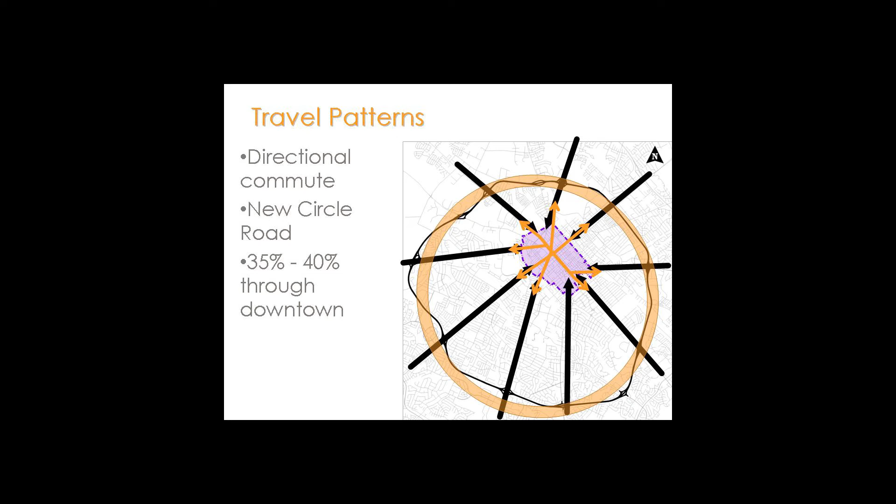But the other thing that we learned as we got into a lot of the data, and something unique about Lexington, is that of all the travel downtown, about 35 to 40% of that is passing through the downtown area. And we actually got this from cell phone data that was acquired for use in this study. So we've got a lot of layers of complexity here. There's been a lot of ideas about what this study was doing and what it wasn't doing. So I just wanted to clarify that as part of our meeting tonight.

What we did was we quantified the anticipated traffic impacts that would be associated with converting these different one-way pairs, identifying the issues associated with that conversion, identifying where we would anticipate the problem areas to be, and I'm going to talk about a couple of those in a minute, including ways to possibly mitigate those impacts. Providing information to the decision makers, and again, that public participation, getting your thoughts, getting your input.

What we did not do is provide recommendations on streets to convert. We also have not provided any design plans for doing so. This study has really primarily been focused on traffic. So we didn't deeply delve into other things like impact on property values, for example. We do touch some on pedestrian safety and walkability, but some of the softer stuff that's really hard to quantify, like the friendliness and sense of place, we recognize that it's there, we recognize the importance of it, but we just did not address that.

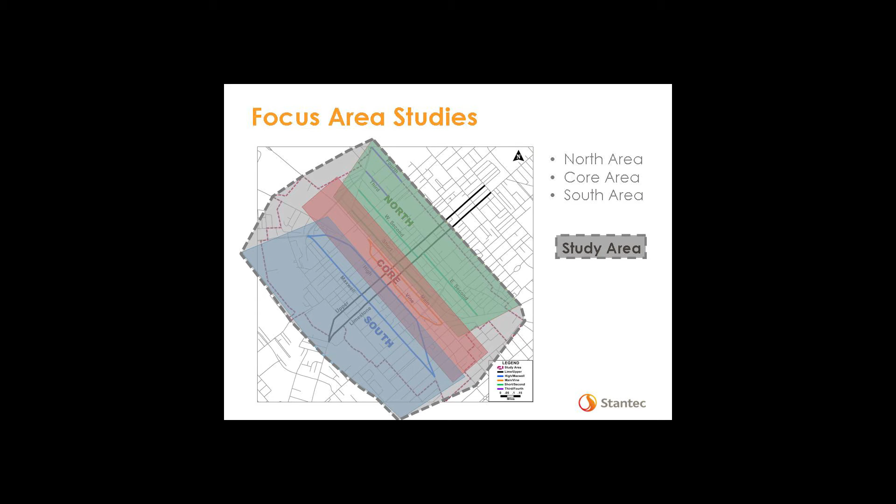So there are the study areas. I won't go over that. I do want to say that even though we looked at each of these individually, when we considered the impacts, we really considered that whole downtown area. So we kind of put a shape around all of it and considered the effect on the whole downtown area. In fact, that grayed out area was really our study area from, say, 4th Street down to Euclid Avenue to, say, Ashland Avenue on the east end and just past Newtown Pike Extension on the west end. That was really our downtown area that we studied.

Just briefly, to go over what we concluded from the North Area study, it was actually a couple of years ago that we had a public meeting on that. On our project website, which I'm going to put up again at the end of the meeting, there's actually the technical document that goes over all the details of that if you want to dig into it. We've done the same thing with the south and the core areas, and we kind of did those studies in parallel. Finished the technical parts of those late last year. On the website, there is a technical report giving all the results of those as well. And then the public meeting for the south and the core areas combined is what we're having here tonight.

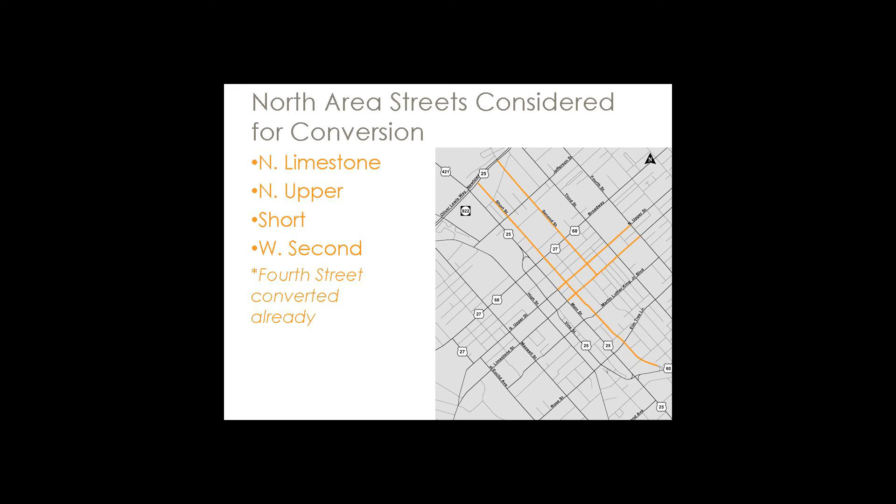So again, for the north area, we examined North Limestone, recognizing that North Limestone and North Upper were different in character and function than South Limestone and South Upper. So we looked at what happens if we converted North Limestone and North Upper beyond Main Street, along with Short and 2nd Street. As I mentioned before, 4th Street had been converted already.

We concluded that when you talk about traffic impacts, using our traffic tools to model this hypothetical scenario, that as two-way, North Limestone and North Upper, Short Street and West 2nd really didn't show a lot of tangible, significant differences compared to those streets being one-way. If they were two-way, we didn't see a lot of difference, just a slight change, but not a lot.

Big reason for that is the amount of traffic on the north side is considerably less than in the core area and on the south. So we can look at our network as having some available capacity that's not being used right now.

One thing that was not feasible was East 2nd Street. And if you think about it, East and West 2nd really are two separate streets. They don't line up. There's a jog in between, and you can't easily go from one to the other. For a couple of reasons, it would not be feasible to convert East 2nd to two-way, particularly on the very east end between Race Street and Midland Avenue.

It's quite narrow. The on-street parking that's there is used for residences, and for some of those places that's all they have. As a two-way street, that would have to be eliminated and would give those people no place to park. The block of what we call Constitution Street, that Sayre Avenue crosses, there's a lot of pedestrian activity, and there's a whole lot of concern by Sayre School about that being two-way. So for those reasons, it did not make sense really to consider East 2nd for conversion.

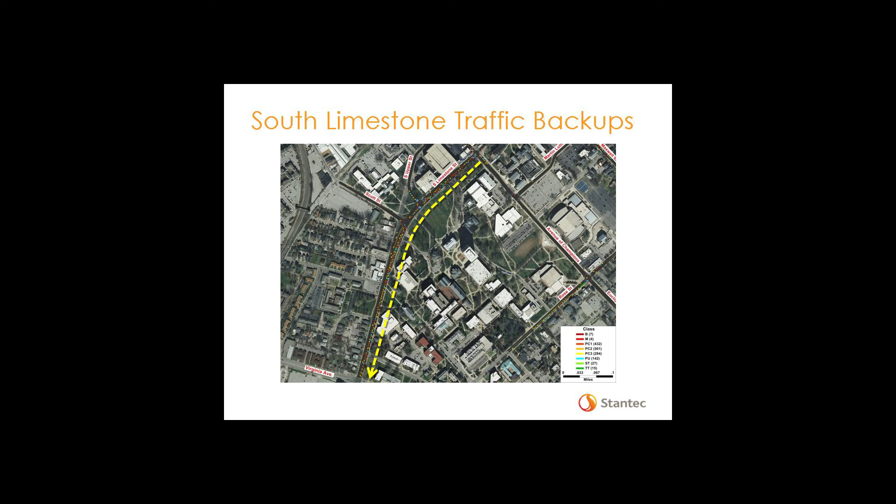In fact, possibly longer than that, but our tool stopped at that area, so we really don't know how much farther. But if the south area streets were converted to two-way, one of the things that we definitely would see would be more traffic backups on certain streets. And South Limestone, particularly in the morning, would be one of those.

Some of the other impacts: at intersections like Maxwell Street and Limestone, or Maxwell and Upper, for example, if two-way, there would need to be a little pocket in the center to make a left turn. So there would actually be 3 lanes, and to do that it would mean that in the vicinity of these intersections we would need to get rid of a little bit of the on-street parking, maybe 150 feet or so back on each leg, so that you could have the room for that vehicle turning left, because all it takes is one car turning left. If you don't have a separate lane, then it backs everybody up because you've got traffic coming in the other direction. So we noticed this effect, particularly in the south area, which means that on a limited basis, some of that on-street parking would be lost.

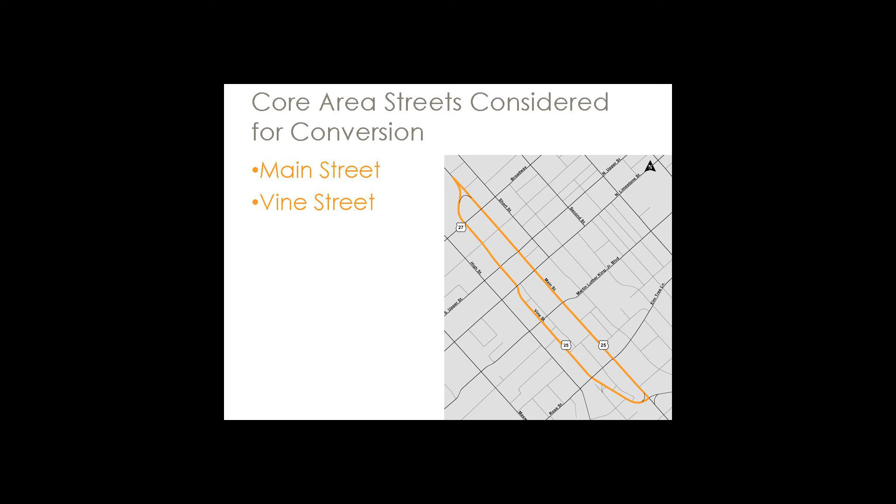The big thing that came out of this is that there was really just not a lot of interest in going any further with this idea for the south area, from UK, from the businesses in the Woodland Triangle. So that was really our finding: to support the conclusions from the analysis, there just wasn't a lot of interest in pursuing this further. And so then the last part is the core area. Again, this is Main and Vine Street.

We started with a number of options for how would you make Main and Vine two-way, and all of these, using these traffic tools, allowed us to do this in kind of a virtual laboratory where we can model this and simulate the impacts without actually having to do it to see what happened. So we identified a number of alternatives. There were a couple that kind of made the cut and went further into really detailed evaluation,

But the whole fundamental assumption was we maintain whatever curb-to-curb width is there now. And in fact, I believe that the council established a 44-foot curb-to-curb limit as part of the streetscape master plan back a few years ago. And so we've tried to stay true to that in identifying these alternatives. So that was one option.

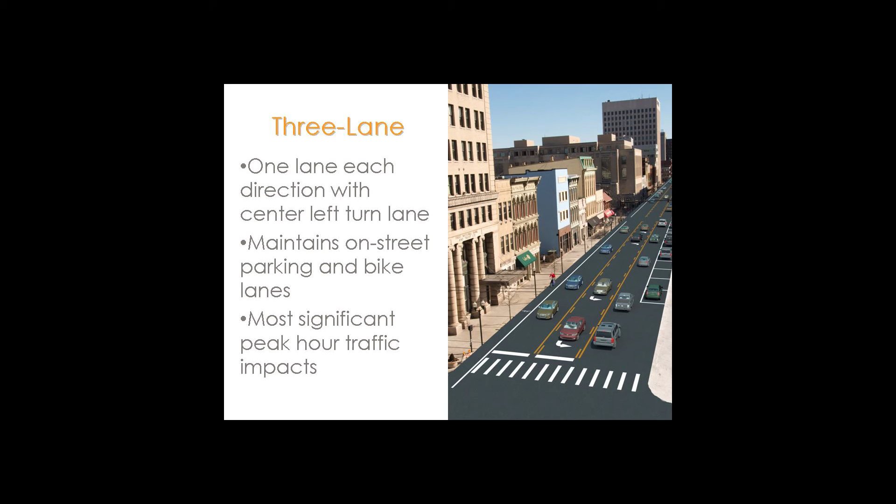Of course, because we are really reducing the number of through traffic lanes in either direction, we would expect, in terms of those metrics that we can use to describe traffic conditions, we would expect the biggest difference between that alternative and the way things are today.

There was another alternative which we called the 4-lane, and it was essentially 2 lanes in each direction instead of 1. And now my thing doesn't want to work at all. So again, what this does is it gives us 2 lanes in each direction. At a number of intersections during rush hour, we would not have a center left turn lane. In fact, because of the heavier traffic volumes, left turns would be prohibited at a lot of what we might consider the minor intersections.

And at some of the most important ones, we have to really get into a final design to tell you exactly how many, somewhere between 5 and 7 intersections, it would be necessary to actually widen the pavement, to go beyond the 44 feet that's there, because we would need 2 lanes in each direction, plus a left turn lane. We still have a pretty heavy demand to make left turns in some parts of downtown.

One of those, today, if you're going westbound on Main Street and you turn left onto Upper to go toward UK, that's a very heavy movement. You have to accommodate it somewhere. So that was kind of a fundamental assumption in this alternative, how would we accommodate that. It also means that, particularly on Main Street, because that width that's there now would be taken up in traffic lanes, that on-street parking would be lost.

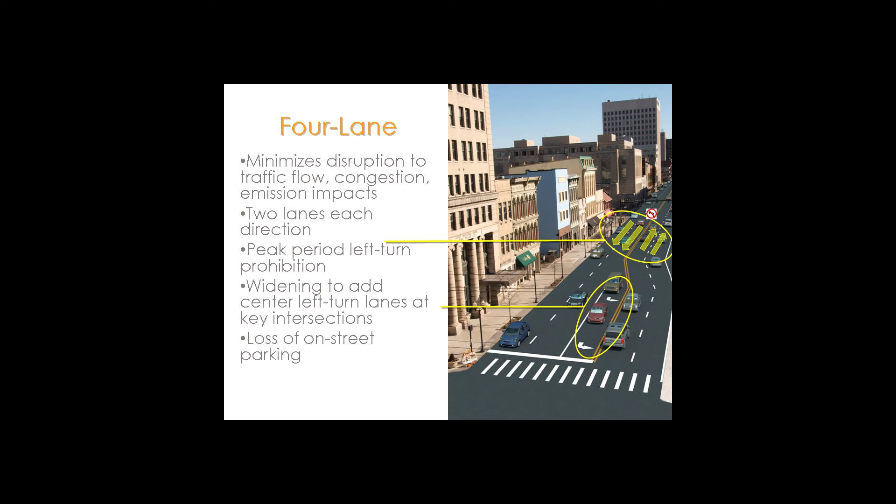Currently, between Rose and Broadway, I think we've got somewhere in the order of 90 plus spaces, and it would mean losing probably about half of those, or up to 50, somewhere in that stretch. All right. And same thing with the bike lane. So that's part of the trade-offs that Dow talked about before. When we consider these alternatives, we also got to consider trade-offs.

So in a similar fashion that we did for the south area, what does this do on this driving around the block effect? And we have both the 4-lane and the 3-lane alternatives. Compared to the way we have things today, they both reduce that circuitous travel, and by how much depends on the time of day. And the main thing to point out is that 3-lane alternative reduces that more than the 4-lane alternative. We're not prohibiting left turns anywhere. You can make the left turns everywhere. So if you look at just from point A to point B, how long it would take to drive that distance, that circuitous travel is reduced more under that 3-lane alternative.

I have to ask a question on that. If you can't find parking? Yeah, it would, and that is the assumption that the parking is there. Okay, so we really didn't get into that. That would be under the assumption that the parking is where you need to find it, but that's a good point. Okay.

When we talk about that travel time, again, within that downtown area, it would be longer for a typical trip, and the 3-lane alternative would increase that overall more so than the 4-lane.

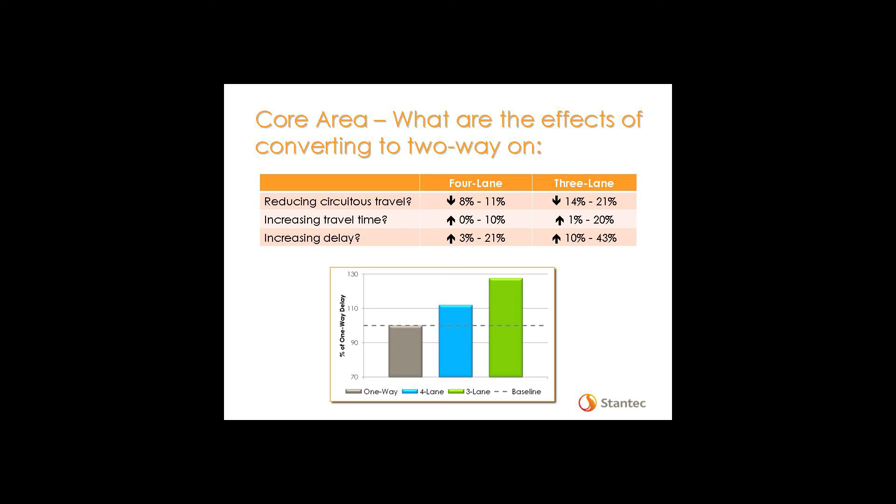Same thing with that extra time, that delay associated with more traffic congestion and slower speeds, all right? And we see the pattern here in terms of the impacts is that those metrics that we use that came from our tools to compare with the way things are today, there's a bigger difference between our current one-way system and the 3-lane as there was between the one-way system and that 4-lane alternative.

As I talked about before, this is just kind of a summary slide that particularly the left turns with the 3-lane alternative, we have that in the center left turn lane. It goes down Main and Vine entirely, so at every intersection we can accommodate those. Under the 4-lane, if it's off-peak, you don't prohibit it anywhere, but there's not a separate lane to turn from. During the peak hour, in some places you don't allow that at all, which means that you have to go downstream to the next intersection where there's a turn lane.

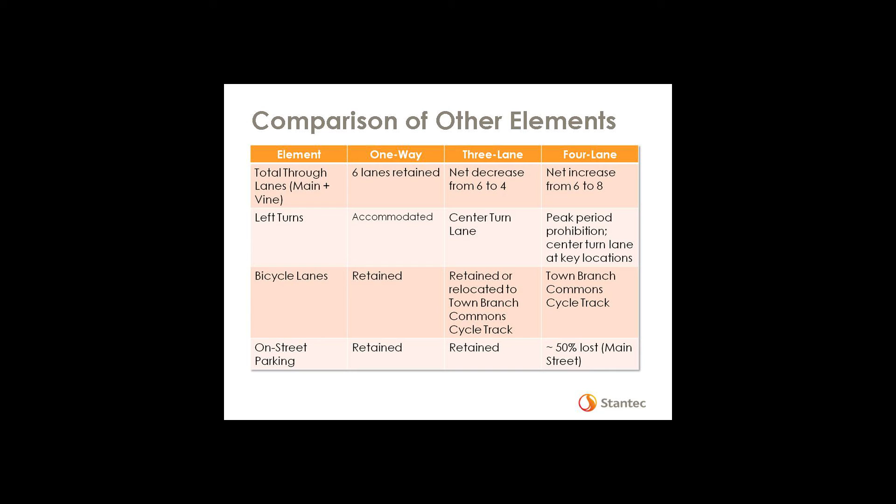The bike lanes, I did talk about those, particularly under the 4-lane alternative being lost. I do want to point out that the Town Branch Commons has the bike facility that's part of that called a cycle track. So if you want to consider that as not so much being lost as relocated, it's just something to point out that if one alternative were to take it away, it's not like it would be totally eliminated. It'd just be in a different place. And again, under the 3-lane alternative, the on-street parking is retained if it's there today. On Main Street in particular, under that 4-lane alternative, we think at least probably half of that would be eliminated.

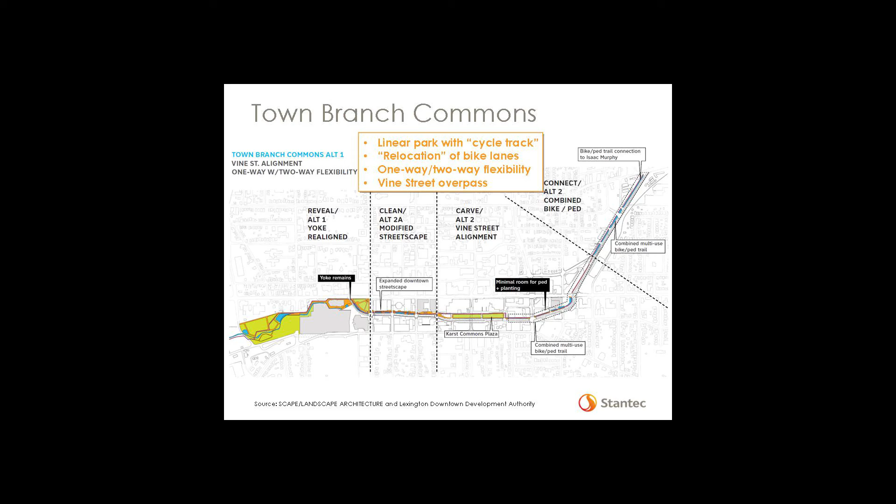Again, I talked about the Town Branch Commons, the cycle track, relocating the bike lanes. The plan for Town Branch Commons is whatever decision is made for one-way or two-way with regard to Vine Street, that it's flexible enough to accommodate that either way. Also, in some of the information I've seen, it does discuss an overpass of Vine Street. We're going to talk about being able to get across Vine Street and the importance of that issue in just a moment. But there's at least acknowledgement of that issue in the Town Branch Commons plan as well.

So just the conclusions from the core area analysis, the 3-lane alternative, when we think about the other modes of transportation, bicycle, pedestrian, even transit, it certainly fits that better, where the 4-lane was really more auto-oriented. Those are kind of like the extremes of how you may convert Main and Vine to two-way. Both of those, when compared to one-way, would produce longer travel times, slower speeds also, the trips would take longer, and the delays associated with that would be higher.

When we talk about the effects of congestion and changing that, we saw more of an impact with the 3-lane, as you would expect, particularly with the impacts I talked about in the south area and the backups on South Limestone. We saw similar effects, particularly associated with the 3-lane, especially coming in on East Main Street in the morning, traffic backing up, say, beyond Ashland Avenue, on Midland Avenue coming into downtown and backing up to 3rd Street or where it becomes Winchester Road or beyond. So we're seeing that in some areas as well.

Also, a likely effect of this would be that our rush hour may become a rush hour and 15 or 20 minutes or whatever. People may wait longer to leave or may come in earlier, so that peak period would just be extended. We certainly have seen that in the growth of urban areas over the years. And while we still pretty much have a rush hour within Lexington, it's possible that could happen as well as a response to that.

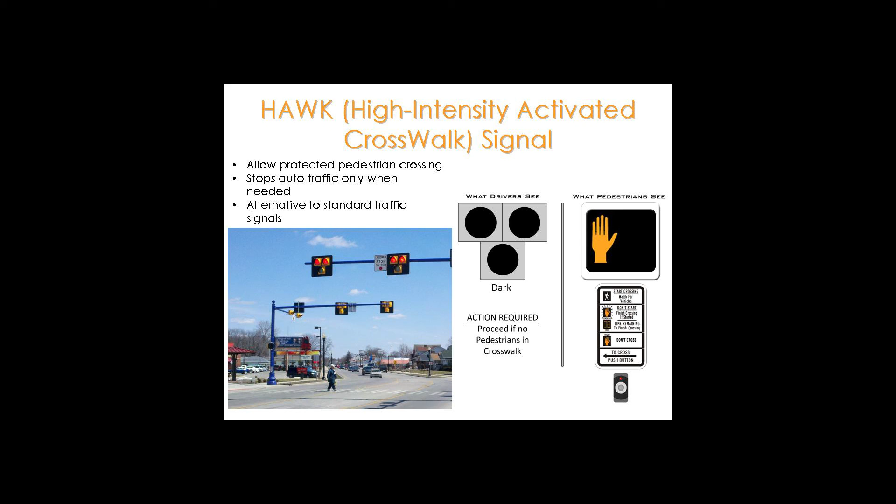You can see the photograph on the left. It tells the driver that there's something going on here. It's a pedestrian crosswalk, and it's actually activated by pedestrians so that as you're approaching it as a driver, if there's no pedestrians, then it stays dark. If somebody has pushed the button, then it goes to a flashing yellow, then to a solid yellow, then to a solid red. The pedestrian gets the signal to walk. Pedestrians walk across the street, then it goes to the ped countdown that we're used to seeing, then tells the driver it's okay to go. So that has been discussed and would be something that we would consider implementing here.

A couple of the other things, we already have a number of intersections where we have no right turn on red. Turns on red, both right and, in Lexington, Kentucky, if we have two one-way streets, we can have a left turn on red as well. But those can be problematic for pedestrians. In fact, drivers making these turn on red movements typically don't look both ways and only look the way from where traffic is approaching and not in the other direction. And so that's why we don't have them around UK, for example. They can be particularly dangerous, and anytime that we add distracted driving along with turns on red, that can be really bad for pedestrians.

And there have been a number of times when I've been walking downtown, somebody talking on the phone, not paying any attention, turning on red when I had the walk signal. So we're already prohibiting turns on red at some intersections downtown. One thing to consider is just making the whole downtown zone a no turn on red area. It doesn't give us a whole lot of extra capacity for traffic anyway, so it'd be something to consider.

And just got a few other slides here. We have one intersection where we have these channelized turns, these little islands there. And this is Main and Vine and Midland Avenue right there by the Herald Leader. And while it may be very efficient for traffic, as a pedestrian crossing that, you actually have to make like three crossings.

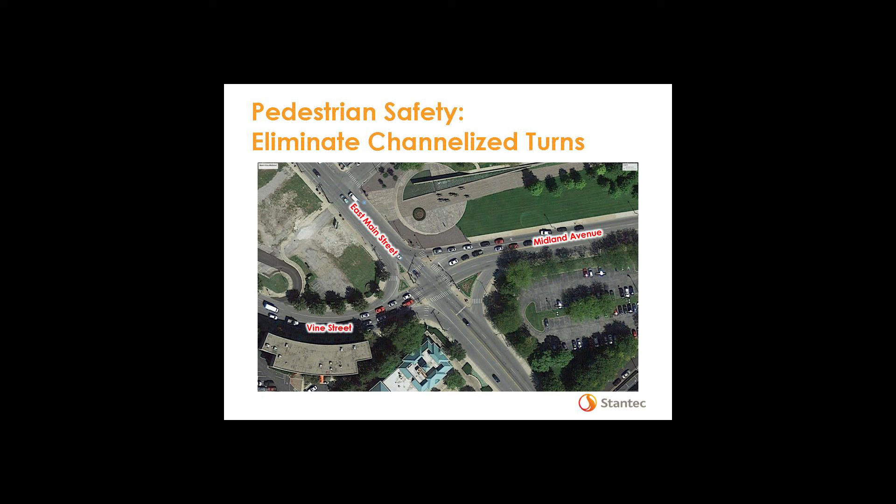And I was talking with our 3rd District Council member and his predecessor. That was one of the things that she complained loudly about, this one particular intersection right here being a pedestrian safety issue. So maybe one of the things that we consider is just tightening up this intersection and taking out those little slip ramps or whatever you want to call them. Not a whole lot of difference in traffic impact, certainly a lot safer for pedestrians.

So we will have some recommendations related to particularly issues like pedestrian safety. But I think we all, from what we've heard tonight, can conclude that this is a really complex issue. It has a lot of parts to it, and in some cases a lot of moving parts. When we started this study, the landscape, or what we thought it was going to be for downtown, looked a lot different than what it's looking right now in terms of what we thought was going to happen. So in some ways it's been a moving target. Certainly it has a lot of pieces to it.

And we realize now that traffic is one issue, but there are many issues associated with this. And with these, whatever decisions are made or not made, there are trade-offs associated with this. I don't think there's anybody in this room that doesn't want downtown Lexington to be a better place. I think that you've all demonstrated that by being here tonight.

And also there's been this wait and see about a couple of major things, including Newtown Pike Extension. What's that going to do to traffic patterns downtown? And Town Branch Commons, what's that going to do? And particularly, will we see more bicycle travel? So what type of effect might that have? So we recognize that there's a lot going on here.